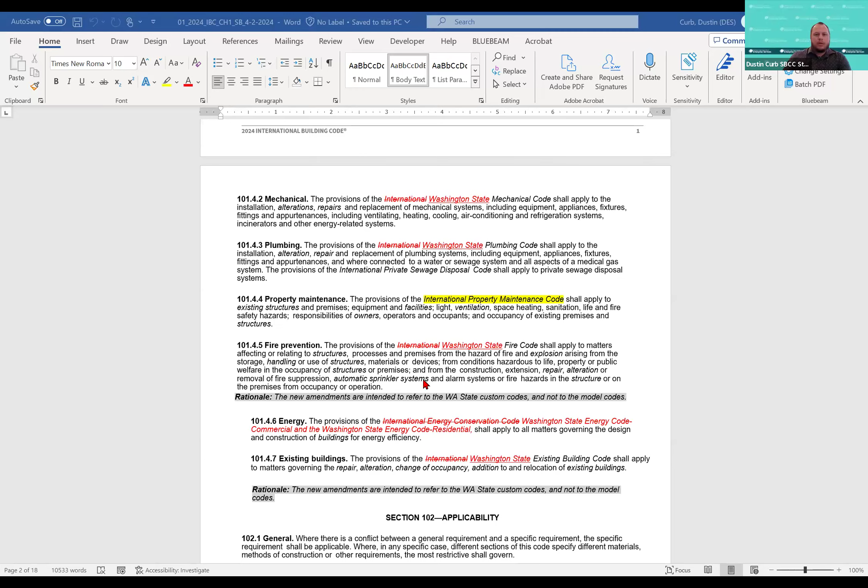All right, so this here is the International Building Code, just chapter 1. Stoyan Bumbalov, our managing director, has put in work on this one. As we get down here, he's got some stuff in red that is pretty much editorial in the beginning of this chapter and is going to be a state amendment. So we're looking for state amendments to be shown in red.

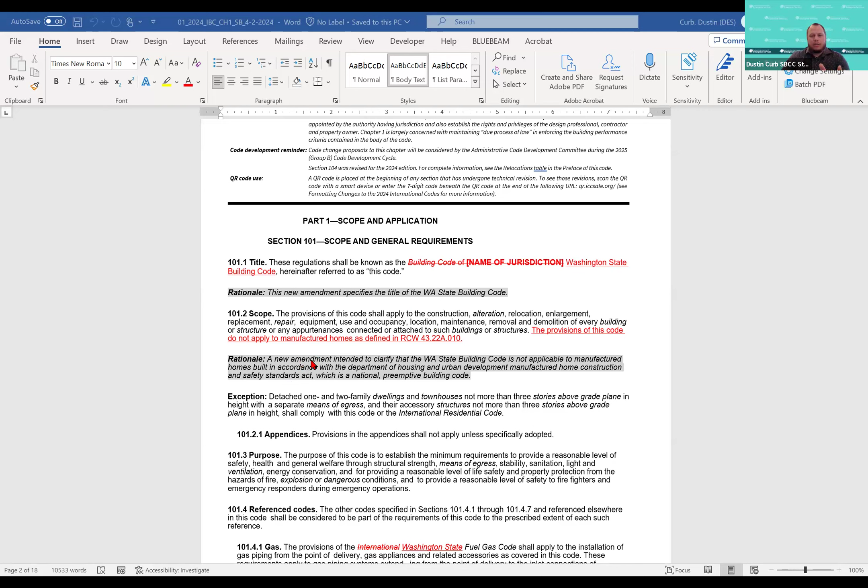Online with ICC, they're using their blue color to show their changes in the document. You'll notice here below 101.1, he's got his rationale on why this amendment is necessary. As we go through and look at what he's got, anything in red should have a rationale beside it. I guess all the Washington State ones are pretty obvious, and he hasn't included that one there.

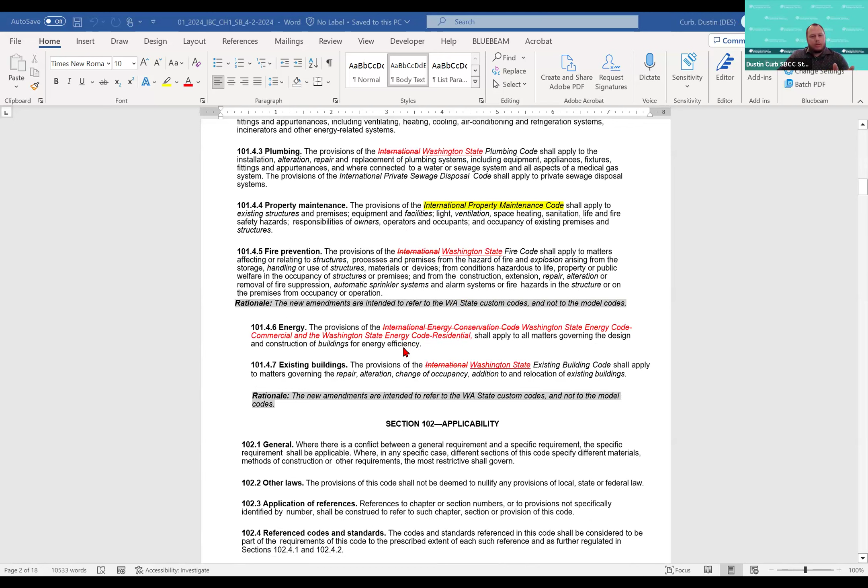As we scroll through, each one of these just has a rationale. What we're asking everybody to do is to work on this document and a spreadsheet that we have, and enter in the code section where we see a change, and make some comments on whether or not the amendment is necessary to remain.

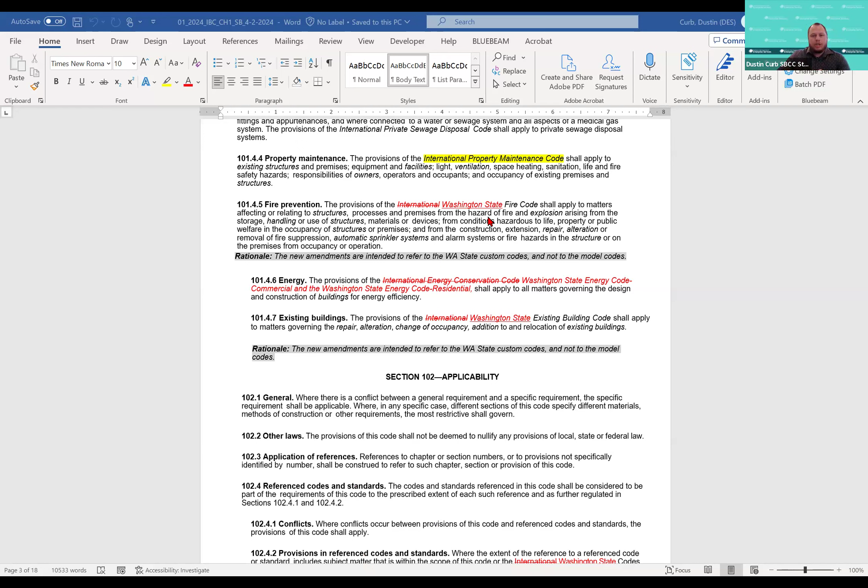Let's see, I think I'm going to change my share a little bit so I can just flip between my windows that I have open. One moment.

Hey Dustin, while you're doing that, I just want to ask if any of the members have any questions about that. It wasn't obvious to me at first what we do in this little first sprint, but it became very clear to me once I dug in, understanding that, especially in cases where we have Washington amendments that might be replaced by the new model code, or that we're 3 years ahead of time—that's a good example of something where we found a conflict.

We just needed to clean up the Washington amendments. So are there any questions on that? I think it helps as Dustin keeps going through it.

Thank you. Here we got Roger, you got your hand up. Yeah, I just would like to ask procedurally, Dustin, are you going to send us this document, or will we have access to it? Yes, I'll follow up after you finish.

The intent of this is everything of chapter 1 of the code. You've all gone through and made your comments. Are we expected to review your comments, or are we also expected to go through and look at the model code and understand the new changes? I would say yes to both.

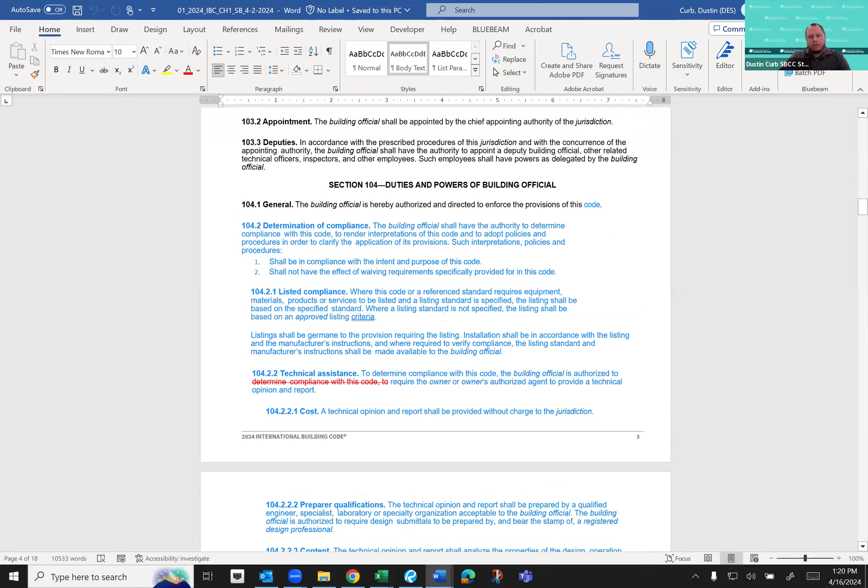So I was trying to use, because the model code uses blue at some time, green for the existing amendments and red for the new amendments. Most of these amendments are editorial - you know, Dustin, you mentioned that, like changing the International Building Code with the Washington State Building Code or some other codes that are not adopted. The colors are not really considered ADA compliant, but we couldn't figure out any other way of showing the changes. So in the working document we'll be using the colors, but that's a good topic for discussion for the technical advisory group.

So you're seeing too many colors here, but you guys can agree on how you can introduce this document and how you can work on the document. I was just trying, for staff purposes, to show the different options, but how you will go with it is up to you.

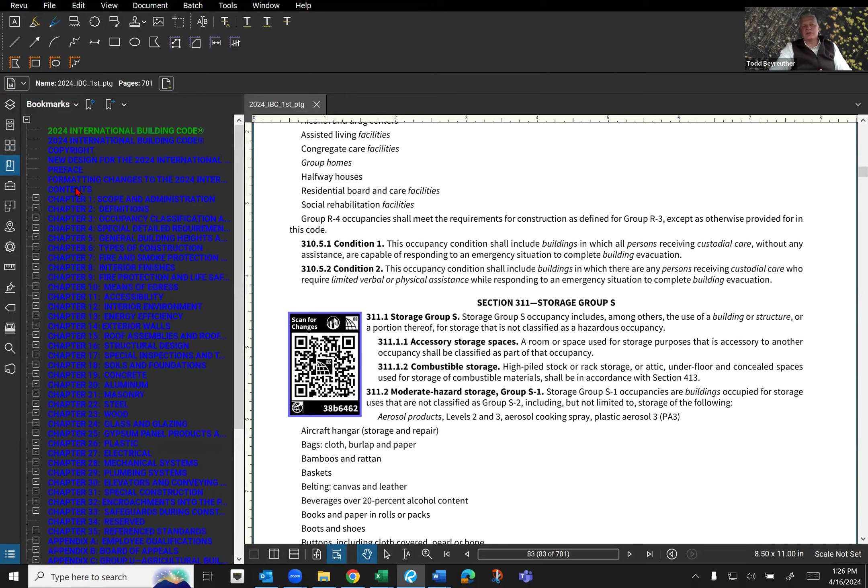I was going to reinforce something Roger just said: once I got into this process, I learned a lot. It was valuable to go through this process, and I learned things about the codes I thought I knew and didn't know, especially the Washington code. But do it in groups, grab a couple of people to tackle some of these. Somebody might do most of the heavy lifting, but it's a good way to get comfortable and learn about it.

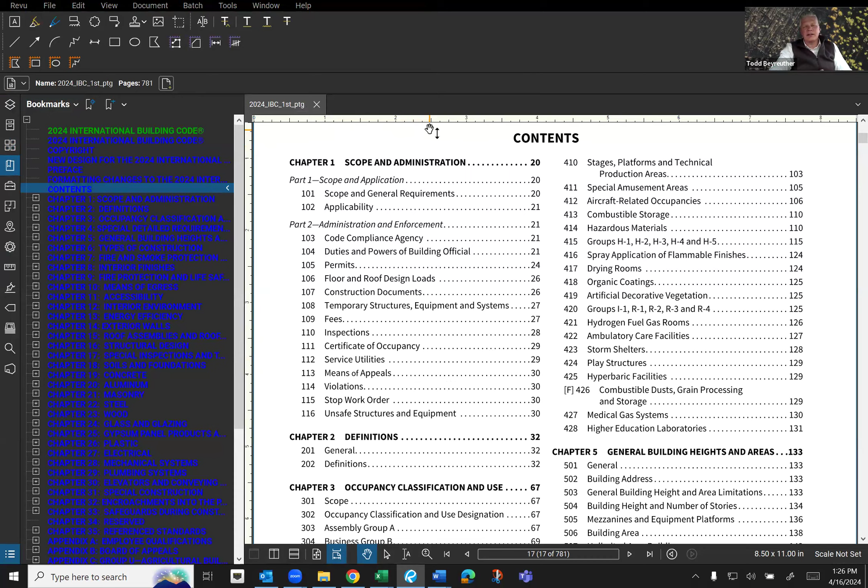Within each chapter, some have more state amendments, some don't, and some chapters have more model code changes. One of the things that was a challenge for Stoyan is there are a lot of model code changes within this particular code text this season. Going through those, thinking about them, and getting ready to make comments was slowing down with the other business the staff has going on at the moment.

Sorry to cut you off, if I can add that: for the 2021 code, we had the significant changes book published by ICC, and now we don't have it published yet. We have the history, a huge Word document, but it's too slow to work with because it's a huge document moving so slow, and you have to check different pages.

Sometimes the proposal is at the beginning of the document and was modified, and there's another proposal at the end of the document, so that takes a lot of time. But many of these proposals, after further research, are just editorial. So for the TAG members, if you have time, go one by one and address every single one. If it feels editorial, just mark it as editorial and continue with proposals that seem like a bigger deal. That's why the report is titled Significant Changes Report.

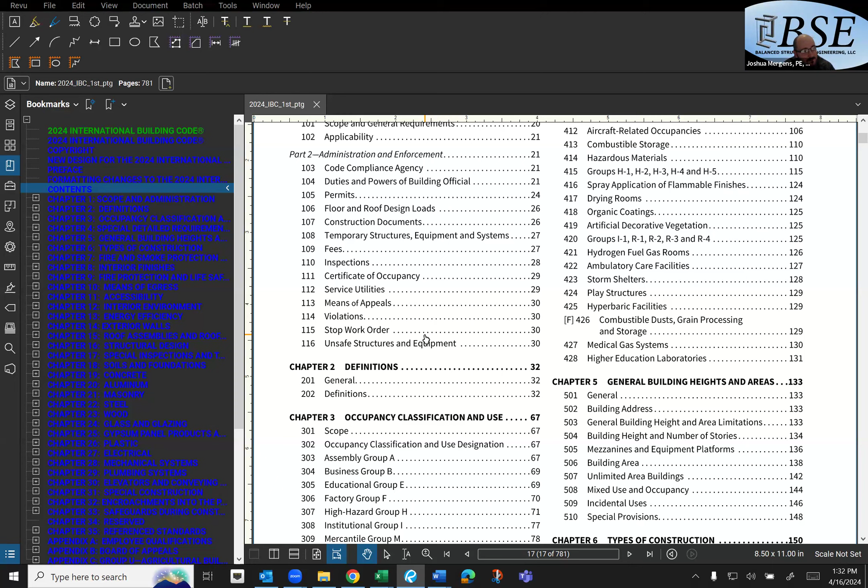I want to mention one other thing, that we have more than just our tag here today, so members of the public and alternates, everybody's welcome to assist in this work. There's no rules that preclude people who aren't necessarily tag members from helping if that's their wish. So I just want to open that up to people who are not members of the tag, and that way we can maximize the resource allotment.

So I have some tentative notes here. Todd, you were saying 5 and 6, and Roger and Josh, I've got you for—these are just rough, I'm not putting your name on these—for 16 through 23. Is there more structural chapters we might want to touch on, or should we chunk them together at 16 through 23 and touch base on others a little later?

Chapters 24 and 25 were in the structural portion last code cycle—they're kind of secondary structures, glass and glazing, and gypsum board products. So for the first go-through, I was hoping somebody else could take those, and we'd focus on the primary structural sections. In 24 and 25, we don't have that many; it's mostly minor editorial modifications, but the heavy lifting is between 16 and 23.

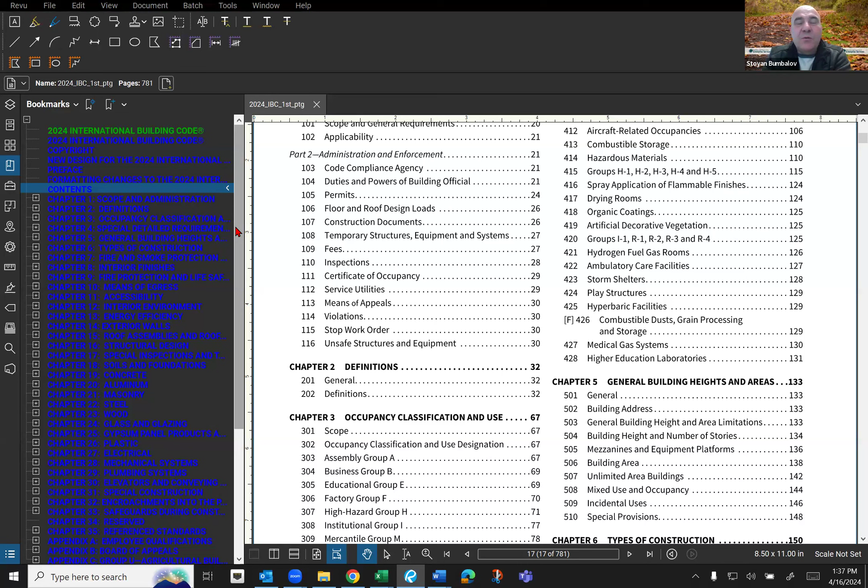Yes, and we have a council meeting on Friday, and Dirk, our Assistant Attorney General, will be there, so we can touch base with him. He may be able to provide some guidance on how to work with this.

I remember for 2021, we had work groups, different tags and different chapters, if there were complicated issues that TAG members needed to work on. But I also know there is a lawsuit with allegations that we didn't meet the Open Public Meetings Act and other things. So it's good if we can get some legal advice on that.

Awesome, okay, back to nuts and bolts. I could use some help on chapters 5 and 6, especially from an architect friend and friends - I think that's important. And that also sets up - we're not doing the proposal work, we're not doing the single stair stuff yet, but I want that team to also join in as we start to navigate that. So these are the critical chapters on that.

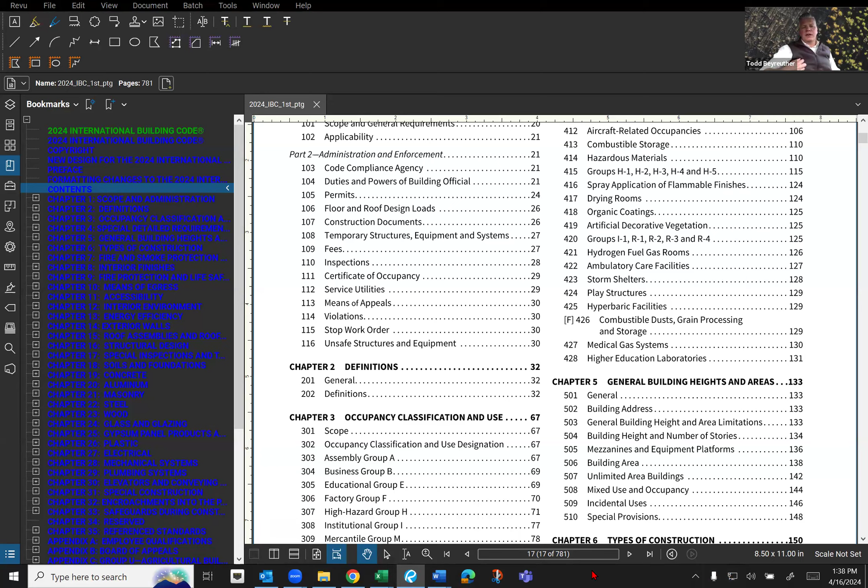I would ask who would like to lead the charge on chapter 7 - that's a critical one. I think probably some of our members at the ICC meetings right now, and going to WABA, will be able to weigh in heavily on chapter 7. But I don't think Sean or others are here, on the fire side. Our fire folks aren't here at the moment. I've communicated with Roger and Todd - we have some more applications for seats to fill, and I believe we're touching base on that at the council meeting this Friday to potentially make that an official appointment for them.

Yes, this is Brett Conway on the energy tag, and I can support - I'm an architect and I can help on 5, 6, 10, and 11. Thank you, Brett. Yeah, this is Joe, the architect - I'll help out on definitely 6 and 5, and other chapters as needed.

Alrighty. Mike? Yes. Barth? Yes. Oh sorry, somebody else - go ahead, Michael. I'll do some work on 7. I don't know if I want to take responsibility for everything in 7, but I'll definitely work on it. Michael, we can probably team up on chapter 7 then.

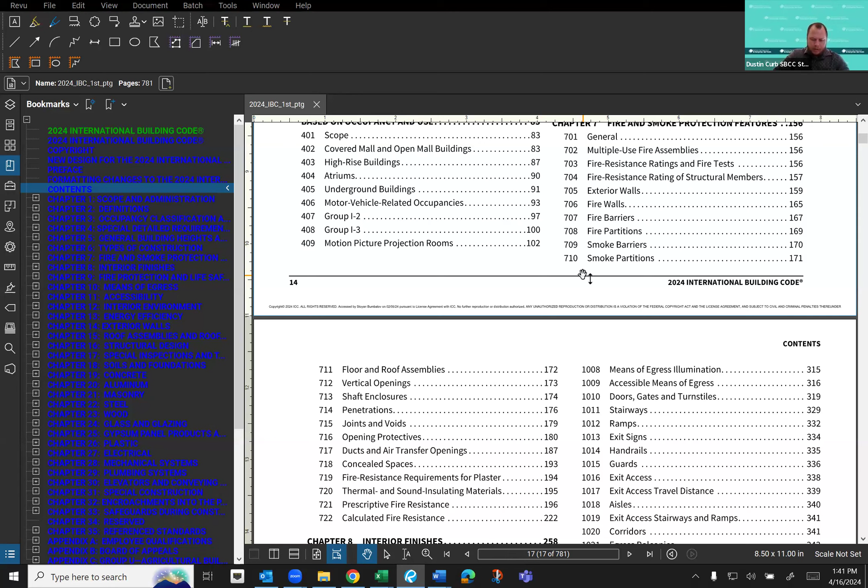So it looks like we've got up to chapter 12, and we've got some volunteers for all of those chapters. So we'll scroll down. Does anybody have, I guess, architectural or energy code type expertise for chapter 12, interior environment, and chapter 13, energy efficiency? Does anybody want to step into those?

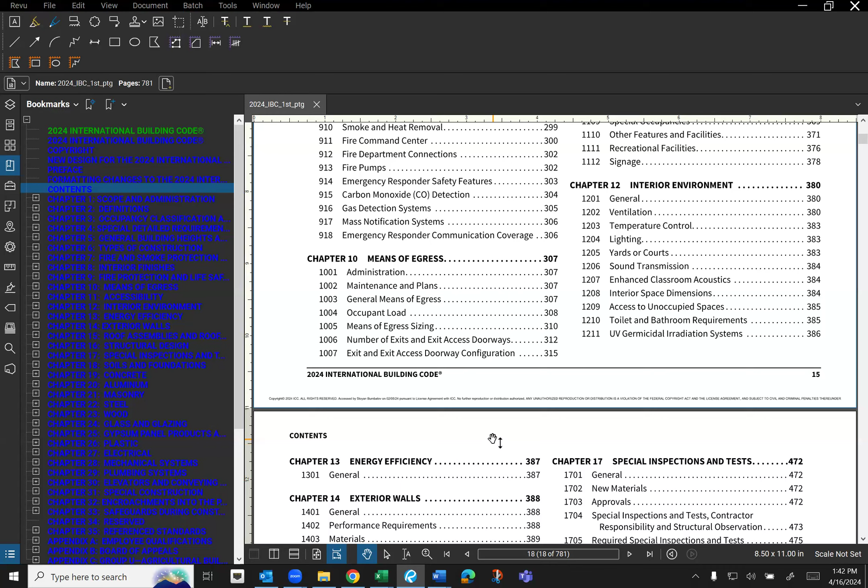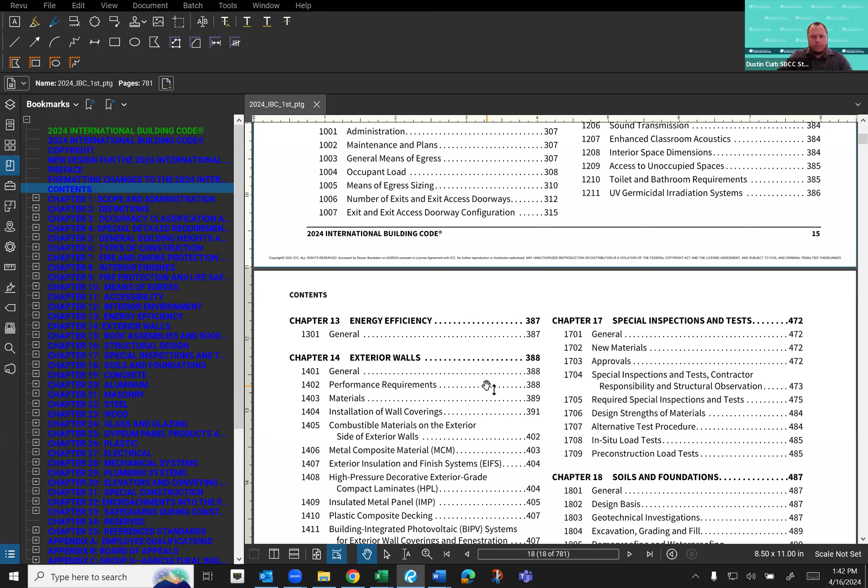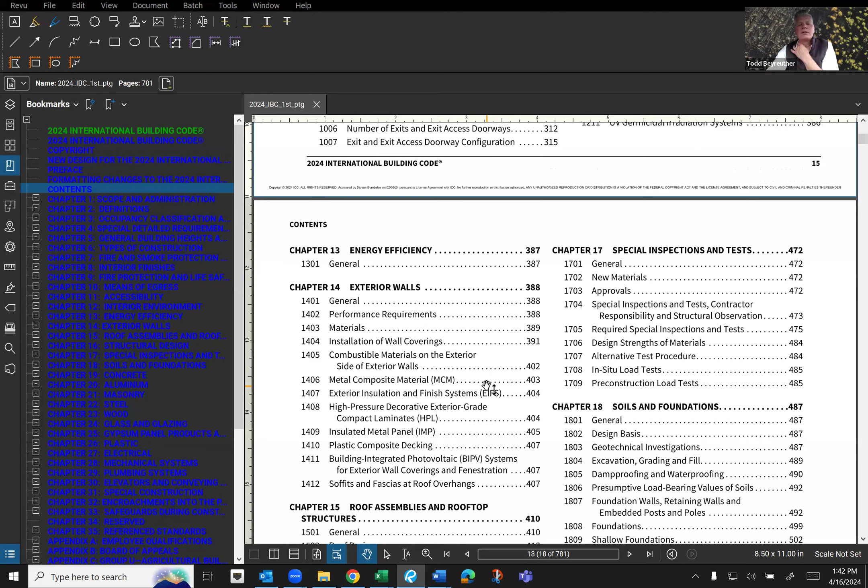All right. Dustin, how about definitions? I don't mean to jump around too much, but that's an important one. Or, I'm sorry, references, chapter 30, what? Oh, 35? 35. Yeah, we can scroll down to that.

Chapter 35, reference standards. It's a whole lot on the table of contents, but it's a whole lot more in the actual book.

And as we do this, if there's chapters left out, hopefully they're just the little work chapters that, as we do the bulk of this work, we can maybe circle back and touch base on some of those and get them taken care of. But if we don't have anybody, that work will kind of fall to staff to finish, and right now that's me on this one.

Well, and maybe that's a good point, Dustin, is while everyone's going through the chapters, kind of flag when new reference standards are in the new code. And then we can make sure that they'll all roll into chapter 35, but that's a good way for the subject matter experts to also flag them. Yes.

All right, so we got some stuff. Do we have anybody who wanted to maybe step up for 35, reference standards? Dustin, I was going to say I have an interest in it, but I kind of want to focus my efforts on structural first. I don't want to commit to another one. So hopefully somebody else can take the lead on it.

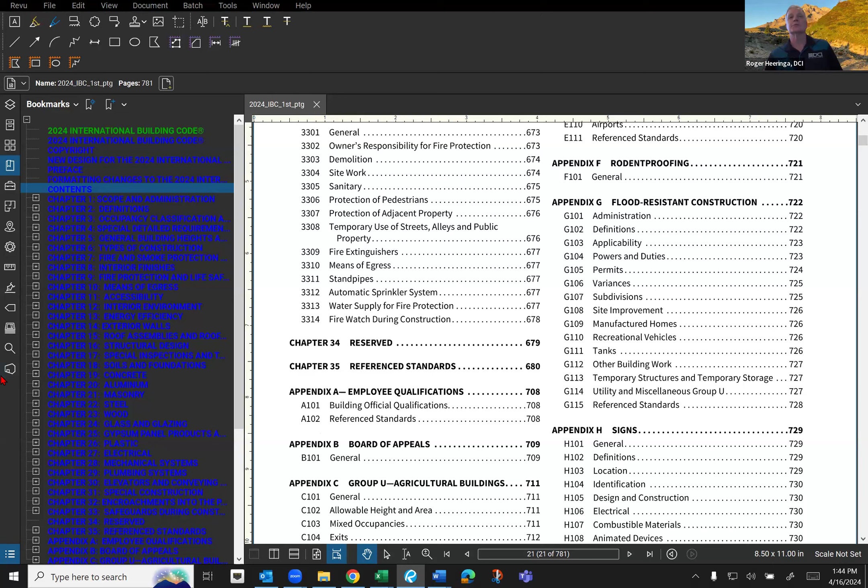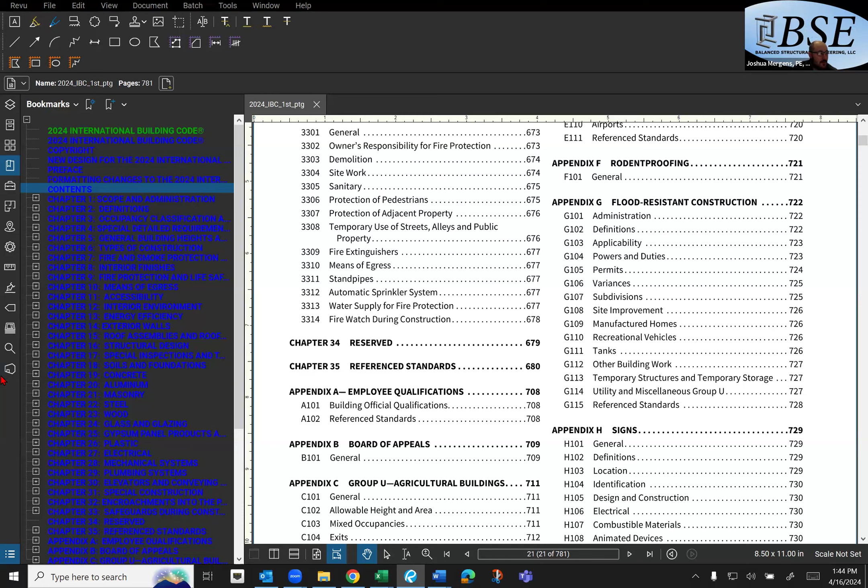Gotcha. This is Josh Mergens. I would be happy to help with 35, though I may not be able to take as many on the structural, but it sounds like we got a couple folks there. So if somebody needs to take 35, I'm happy to take 35. Okay.

And Dustin, this is Brett Conway. I misspoke, I volunteered for 32, if you could strike that. Okay, I accidentally jumped into the fire code. No worries, got your name stricken from that one.

All right, so I'm going to scroll back up to chapter 14. I believe this one is kind of energy code related. Well, no, I'm sorry on that, this is just exterior walls. I'd be happy to put my name on this one if anybody else doesn't want to step up for that one. Okay.

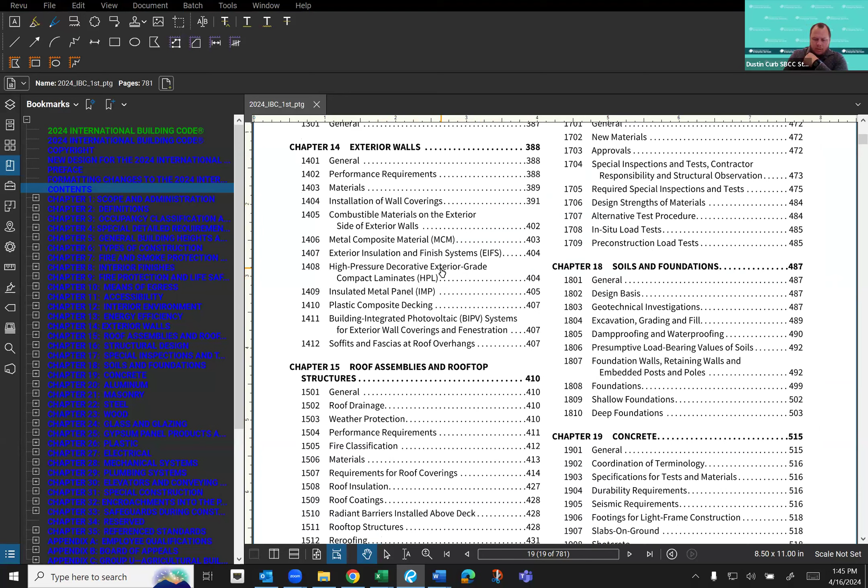All right, 15, roof assemblies and rooftop structures. Would it help if I went and looked at what we have for state amendments in these chapters as we talk about them?

All right, well, I'll pop over to chapter 15. We'll just look at what we have in there. Well, work with me.

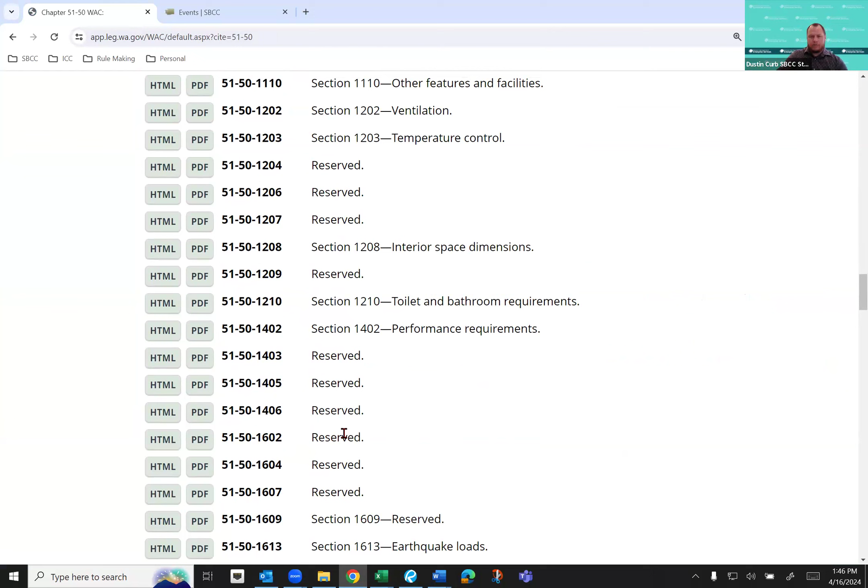There are no state amendments in chapter 15, so I'm going to volunteer for that one as well. This will just be looking at any changes within that chapter and checking it out. And then for chapters 16 through 23, we've got Roger and Josh. That takes us to chapter 24.

We have reserved in chapter 2400. We've got a couple in here. There's not much for chapter 24 as far as state amendments. Does anybody want to volunteer for chapter 24? I'll take 24. I'm new to the process, so it'll help me get involved in it.

Steve Belzak? Yes. Okay, awesome. I was going to say your Zoom name looks like just your first initial. Oh, okay, thank you. Okay, I got you in there.

Chapter 25, no state amendments in there. To be honest, I haven't flipped through to see how much is in any of these chapters. Let's see, going back to the table of contents.

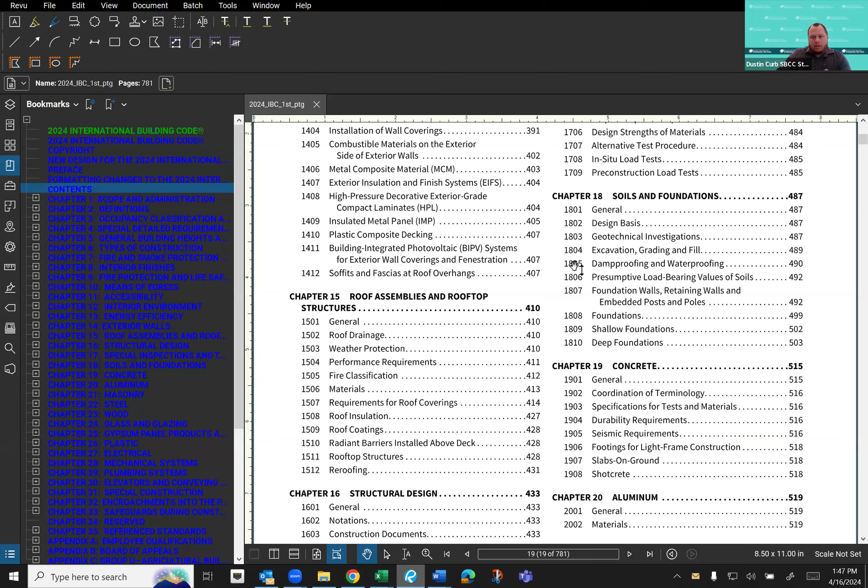25 is for gypsum panel products. We were saying this one kind of falls into the structural category a little bit, but I think the folks taking structural at the moment already have plenty on their plate. Is anybody into chapter 25?

Since there's no state amendments, I will volunteer myself for that one. All right.

Stoyan, I have a quick question for you about the International Existing Building Code. On the surface, it looks like that's kind of tagged on with the building code. I haven't had a chance to look at exactly how many amendments we have within there. We have sections for all of those chapters. In your opinion, would you consider the existing building code a big lift for this group by the 25th? It's not a big lift, but it's a lift.

Gotcha. So, like weightlifting, depends how much weight we can handle. Yeah.

So here's maybe my idea: get the building code assigned out and maybe circle back and reassign the existing building code as things start getting finished up on the building code. Does that sound like a plan that might work for everybody? I don't want to overload everybody and have people stressed out, but like Stoyan said, it's a lift, and so far we haven't touched it yet. I just wanted to think about it as a strategy, coming back to it after we do a little bit in the building code first.

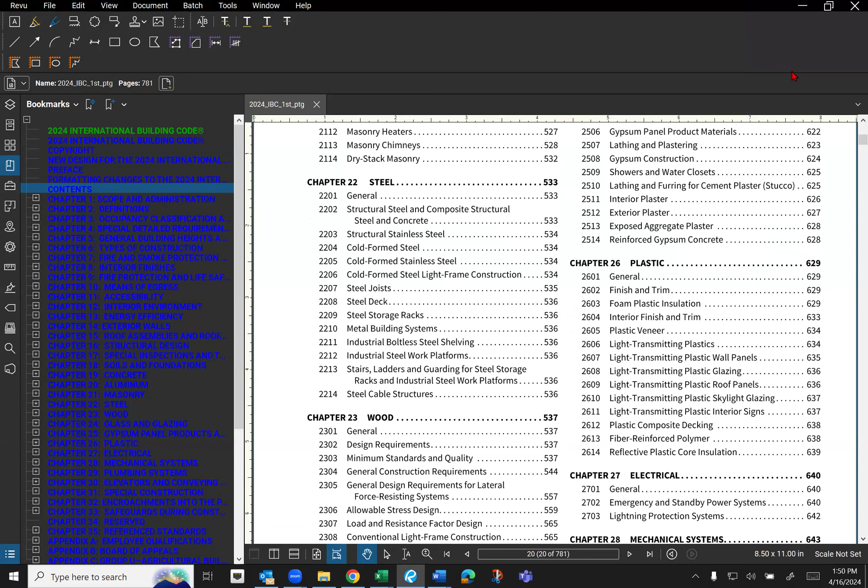Doesn't look like there's a whole lot going on there that we have for amendments. Let's see, it's all reserved in the WAC, so we're looking at model code changes in that one, so that one's not a huge push.

27 is electrical. Since this will be my first code cycle working with the entire code, I've done some rulemaking since I've been with the State Building Code Council, but electrical is regulated by L&I. Stoyan, I don't think we have amendments in chapter 27.

Is this something with emergency and standby power systems? I think in 27, just give me a few seconds to double check. I think we hit a reference or something, but you can skip it and it'll give me a couple minutes to double check.

Okay, we'll skip 27. Dustin, just a real quick though, is that to memory? That's where we have the PV ready, right? The EV ready stuff. No, not the EV, the photovoltaic, the roof is it. Maybe I'm just getting confused from our previous work, but we're talking about rooftop solar stuff. I don't believe it's in chapter 27.

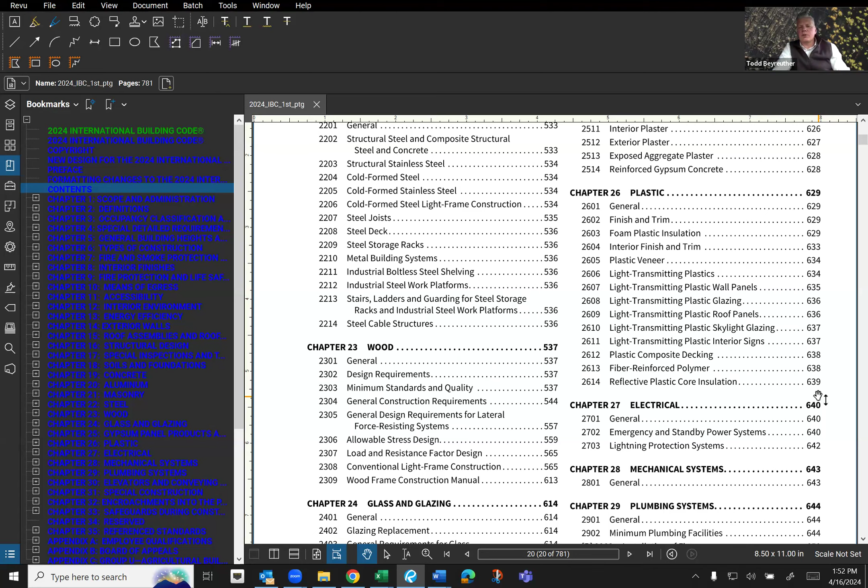You're gonna get me lying if I start talking more about it. Oh, it's okay, I don't mean to go through it right here. I just meant to give people some context, that's the kind of stuff to look for. Yeah, so we could take a quick look at what the amendment is in that section that we've got.

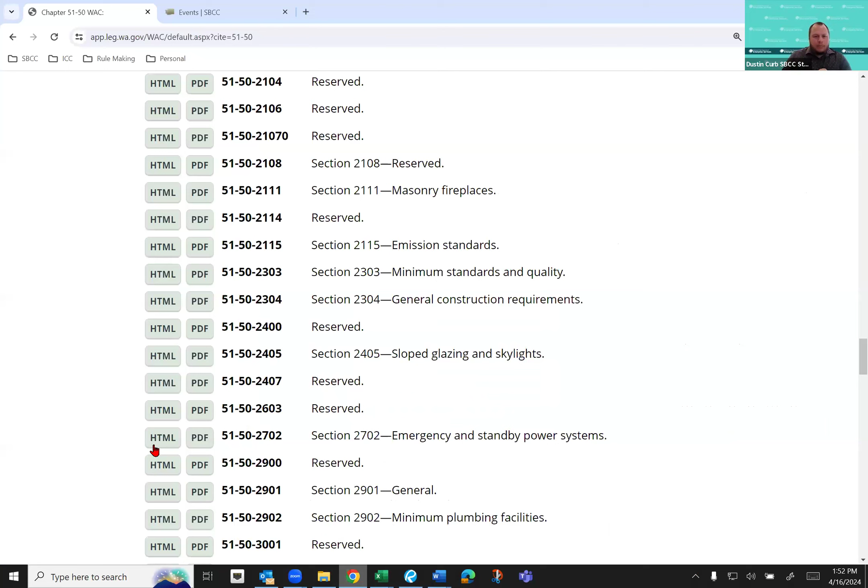We have only one amendment in chapter 27. It's in 2702, emergency and standby power systems. So it's a simple amendment. There are minor changes to the model code as well, but not a big deal. Okay, so we're gonna come back to 27.

We passed over 26, I don't want to go there. For plastics, I'll put my name on 25, 26, and 27. I think that'll work for now. And then do we have any folks who like mechanical here in the room?

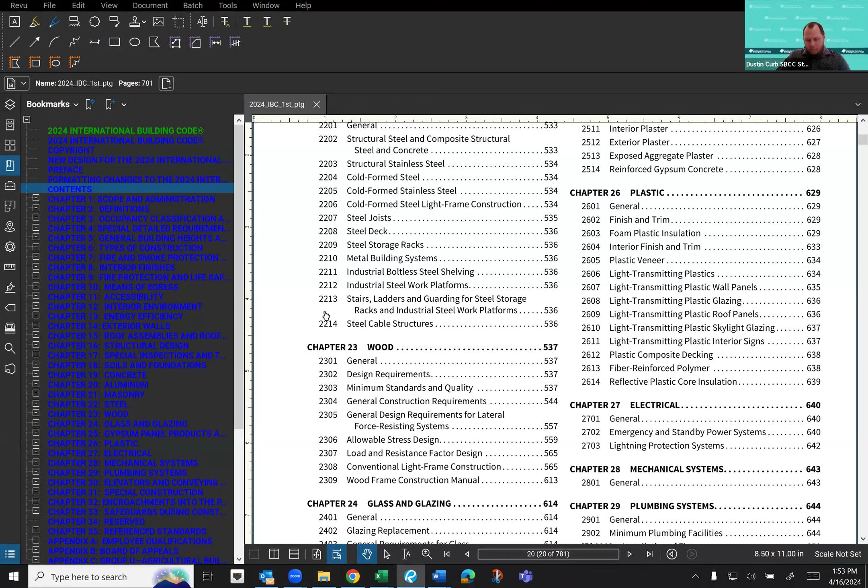I don't have my guest list up anymore. Seeing no hands, we'll move forward from the mechanical section to plumbing systems. We don't have a whole lot going on in there.

29, no, 29 is a big deal. 29 has a lot, big one. And we put a lot of work into it in 2021, but there were many folks that didn't like the outcome, so this table with the plumbing fixtures may need some additional work. So 29 will be difficult.

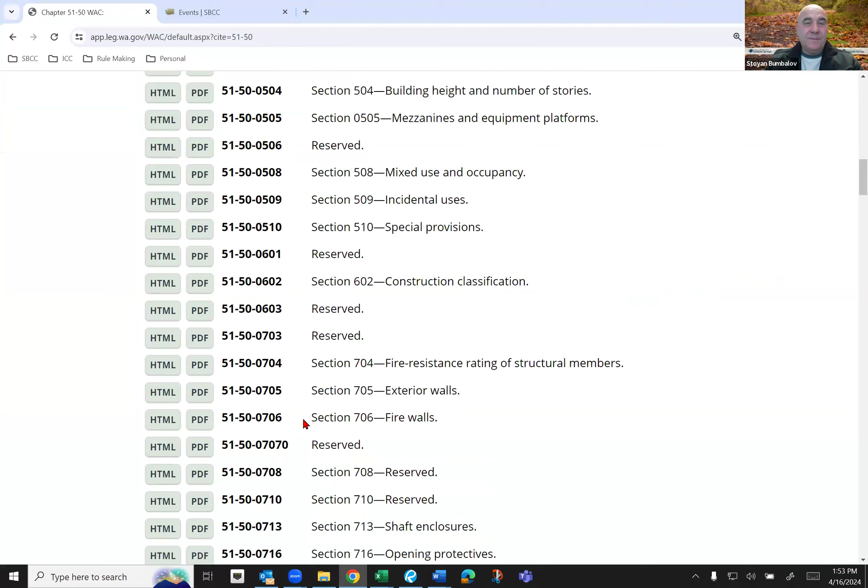Will it be difficult with the proposals or with the existing amendments? I would say with the existing amendments. Okay.

Excuse me. Okay, do we have anybody who wants to take on the plumbing section for these reports at all? And I guess I would also point out that, like Stoyan said, we got some folks who aren't here, who are in Florida, and we can circle back and maybe divvy out the rest of the building code at that time.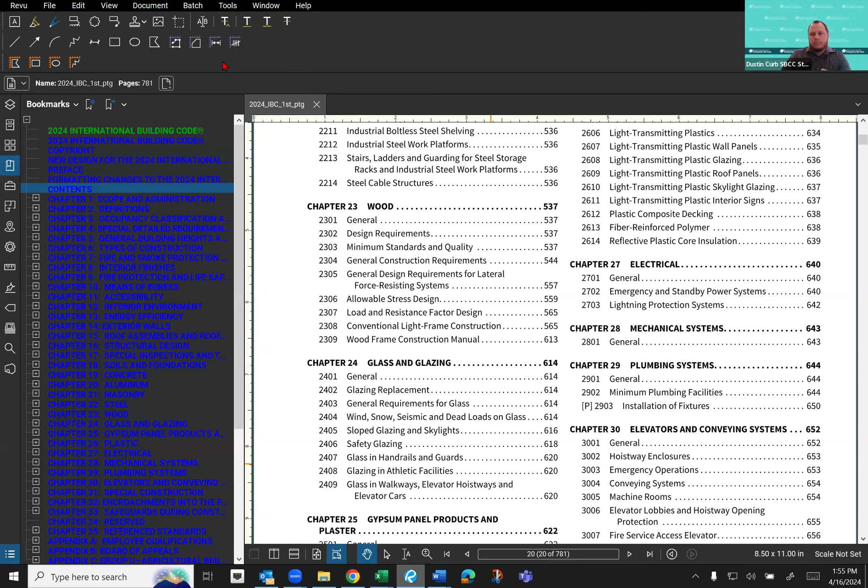It seems like we've got the bulk of it covered with at least some folks willing to start it. Let's see, chapter 30. Let me get back to the table of contents. Elevators and conveying systems. And then 31 we have Andy, and 32 we have Andy as well.

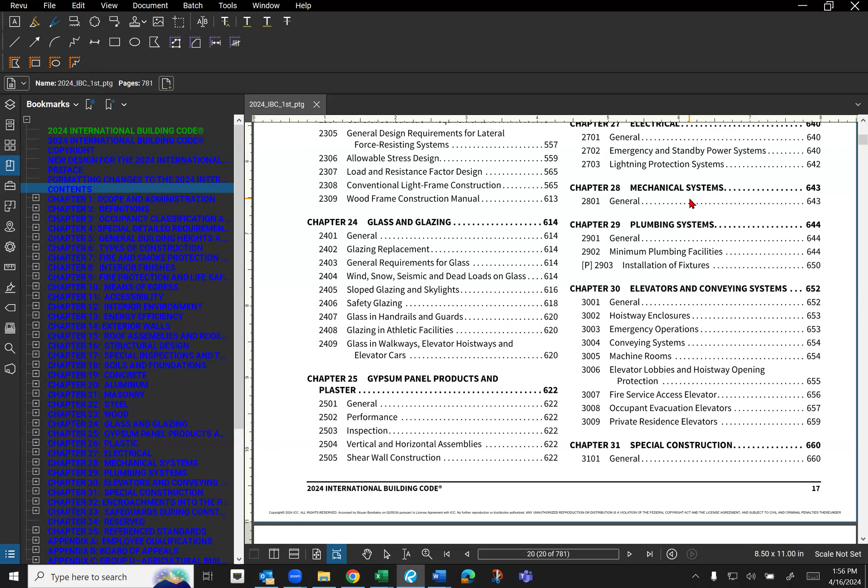I believe that's everybody's recollection? Yeah, Dustin, I signed up for chapter 30 and 31, but I know 31 is big, so if anybody else wants to take on some of 31 as well, that would be good.

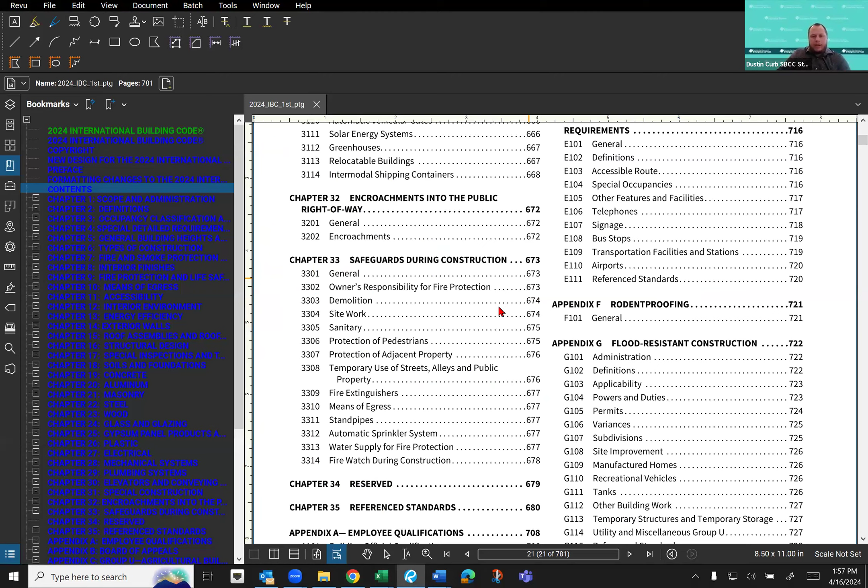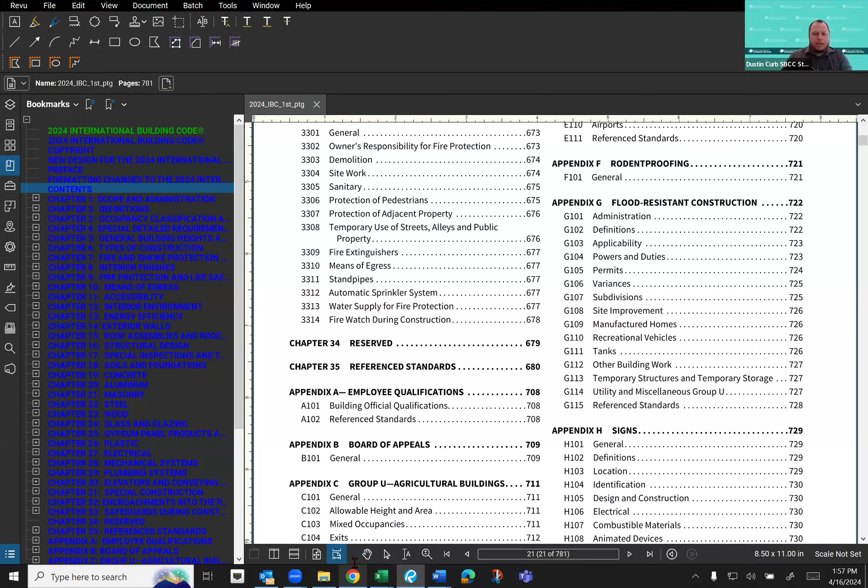Looking back at what we got going on here, there's a fire watch amendment in chapter 33. Not a whole lot. Anybody up for chapter 33? Seeing no hands, we got 34. Let me skip back over to the table of contents. It's a reserved chapter, so we don't have to worry about it.

And then 35, we've got Josh. And then I kind of have the appendices all listed as kind of one group. I know that's a big ask on that one. As far as our amendments in these sections, we have Appendix P with an amendment in it. And it's a little bit bigger than some of the other ones we've looked at here today. Anybody want to look at Appendix P for us? All right, Steve Belzak here, I can try that one. Okay.

And Dustin, this is Brett Conway, you can put me next to 29 plumbing. Okay. All right, I think we've gone through all the chapters and have some volunteers for most of them. Does it sound like we kind of have a jumping off point for some work to get started?

And I guess what I would tell everybody to expect is tomorrow morning to be looking for an email from the State Building Code Council that's going to have the chapters that we have your names next to. It's going to have contact information, and you're also going to get a spreadsheet. And I guess that's one thing I haven't touched on yet, is the spreadsheet.